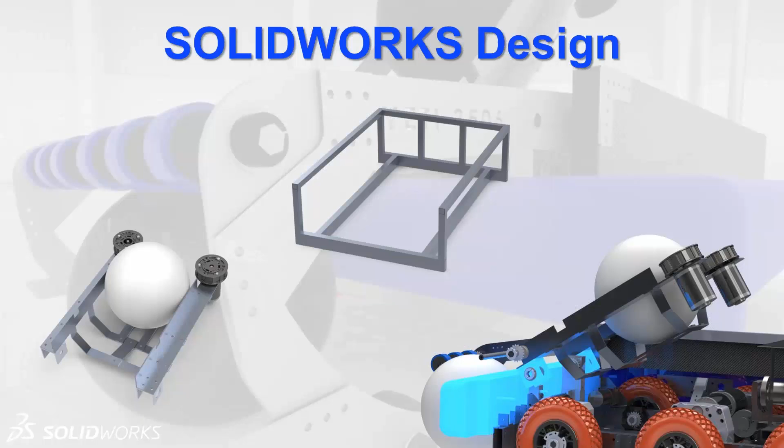And this season's build, nearly 6 weeks of hard work from very talented students and guided by dedicated mentors, concluded just 2 days ago, and competition begins next week. Today we're going to look at how SOLIDWORKS enables these students to design these amazing robots in such a short time frame.

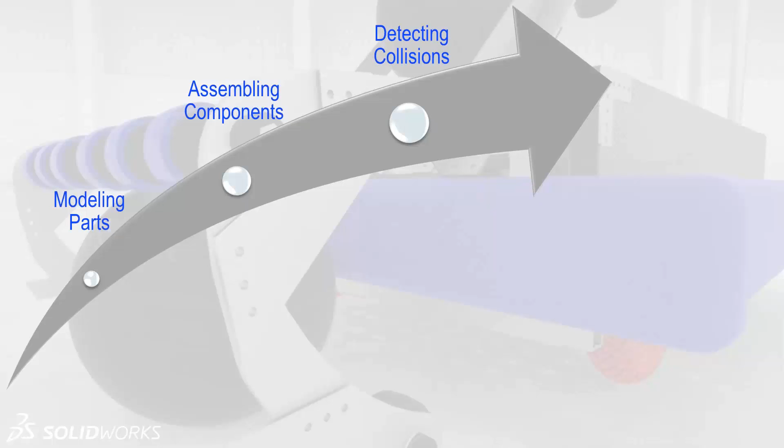So breaking it into 3 segments, the first segment we're going to address creating models of components, whether they're multi-body parts like you see in the frame example here, or individual parts. Typically we get a concept, we sketch it out, and then we start our 3D modeling.

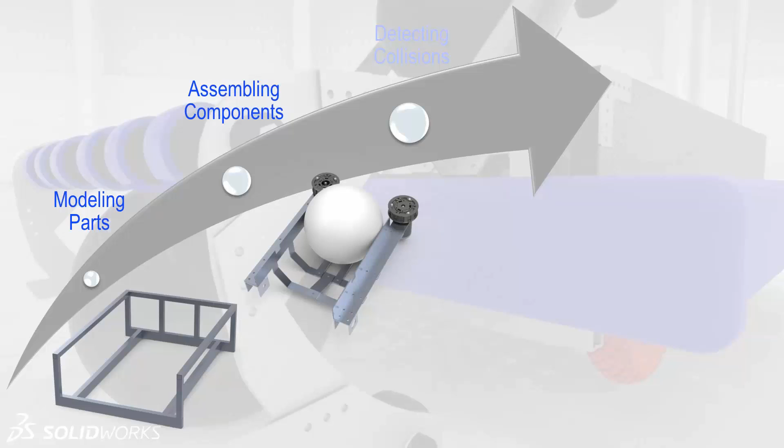Once we've created some models, then we assemble components. So we'll have a segment that focuses on creating assemblies. And then lastly, we'll take a look at a segment that shows you how to leverage your 3D data. Obviously, we're talking about working with some pretty complex designs that have a lot of moving components and requirements. So taking a look at leveraging our 3D data to get the most out of our 3D information.

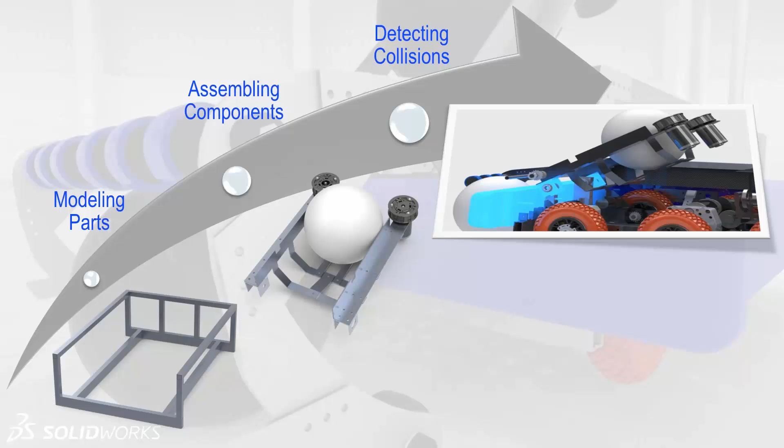So our first demonstration segment will go from a concept sketch of a layout of what the frame needs to look like for this particular design to a finished part that's ready to go into our robot.

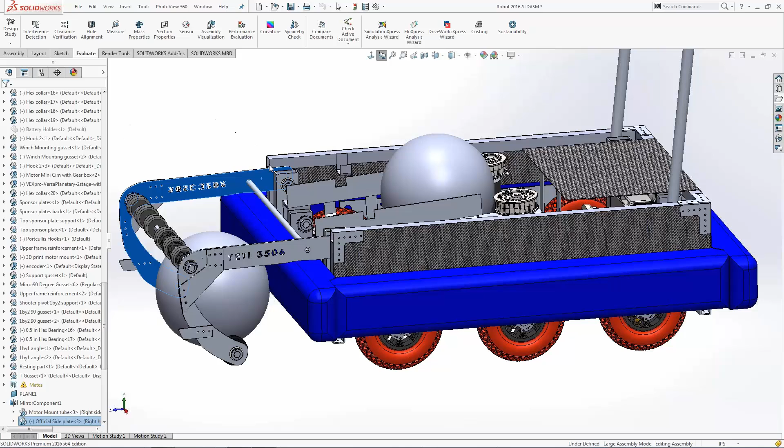So to get started, we'll take a look just at the finished robot here quickly. We do have some moving components within our assembly. We do have some simulated real-world moving components.

We'll take a look at the frame structure that we're going to be working with. So the frame is aluminum extruded square and rectangular tubes. So regardless of the profile that we choose to use, the philosophy kind of goes the same. We start with a layout and then we start populating our structural components. So let's take a look at that.

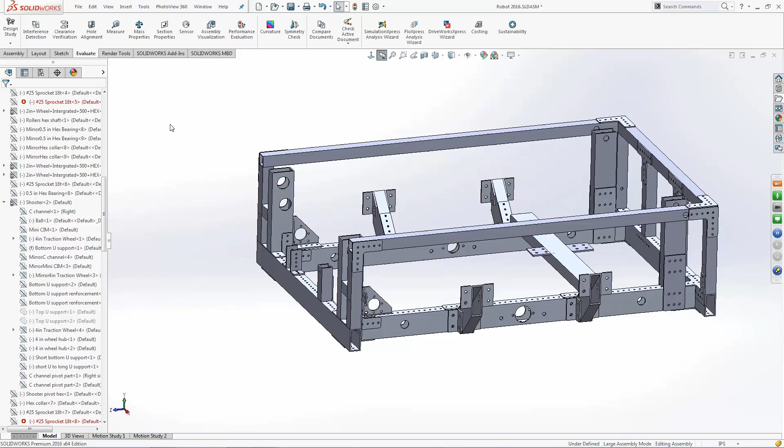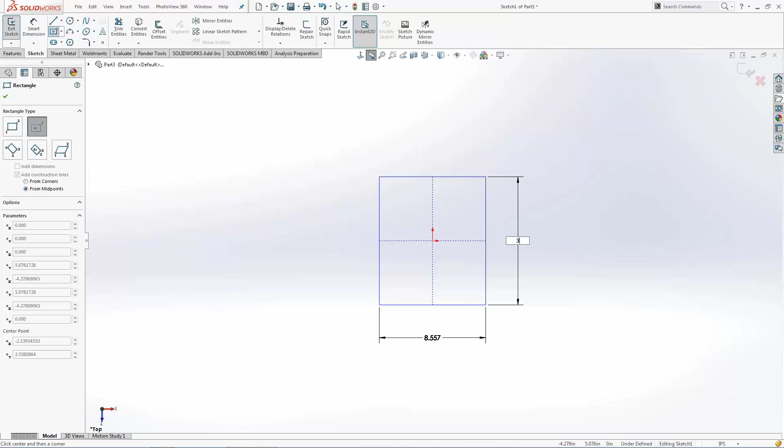We'll start by launching a new part in SOLIDWORKS. And the approach that I'm going to show is slightly different than a traditional approach. This approach kind of allows you to do a layout sketch as you would normally do. But in addition to doing a traditional layout sketch, I'm actually going to start by generating a solid, and then I'll use that solid to generate my 3D sketch. It's a little different technique.

One of our application engineers created a 3-minute Thursday video kind of showcasing this design process, calling it wicked fast weldments. Okay, so I've got a base structure of the overall shape.

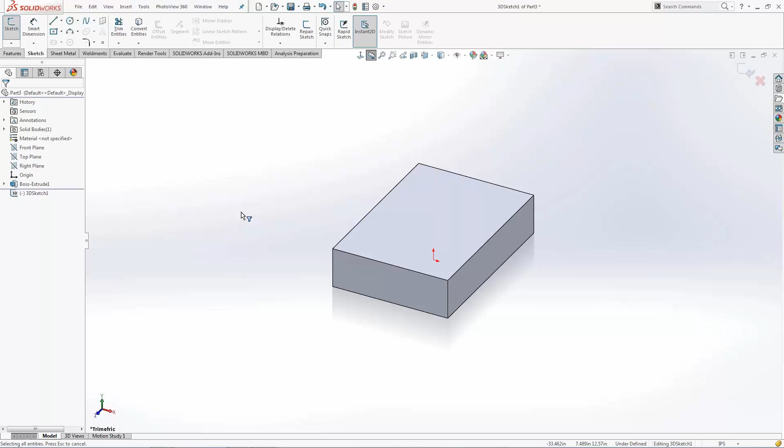This could be very simple like you see here, or it could be more complex. And the idea is we're next going to create a 3D sketch. We're going to select all the edges and we're going to convert those into our 3D sketch. So very quickly we have a nice layout. We can kind of hide away that body, get it out of our view, and we have a nice overall layout of the shape that we want to use.

So some of this information may not be needed, so I'll keep it here just for reference, just for my own purposes.

And next, there's some vertical support structures. So rather than doing any separate sketches, it's really not needed. If you're working with a three-dimensional sketch, it's very simple and straightforward to just go ahead and continue adding these sketch lines within your three-dimensional sketch.

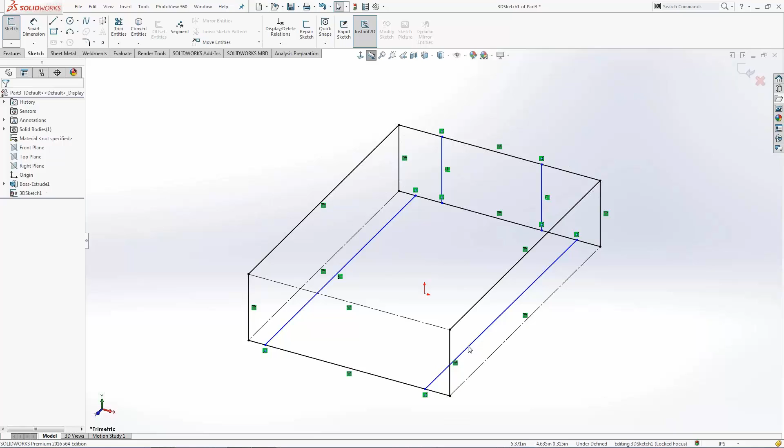Okay, so in sketching in a 3D environment, we'll just pick up some relationships along various directions so that we can ensure these lines are lined up as needed. And if not, we can simply add relations. So in 2D sketches, we're doing horizontals and verticals. In 3D sketches, we're going along specific axes. So to finish off my sketch, we always want to use fully defined sketches. We'll go ahead and just add in a couple of dimensions here.

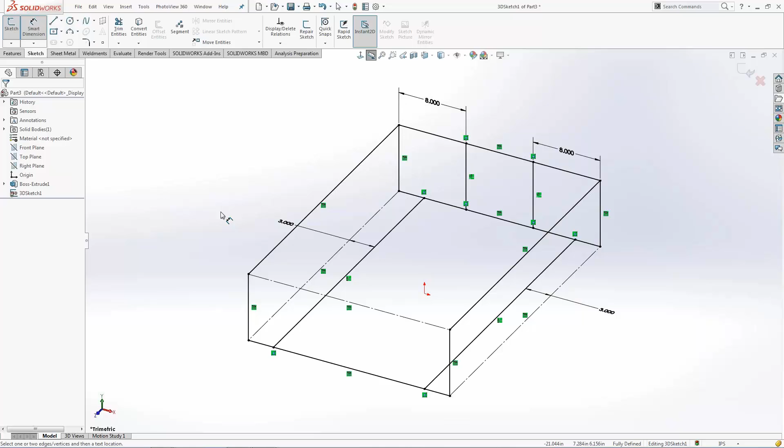So there's my complete layout sketch. Fully defined sketch, it's got all the information that I need. And again, it's going to be very simple to make changes later on.

So for structural members, once we have our layout sketch, we go ahead and launch the structural member command. In dealing with weldments, we're able to pull from a vast library of various types of profiles and shapes we might want to use, such as I-beams, angles, square, round, rectangular tubing, things like that, aluminum and steel, all built together in a nice library that comes with the software.

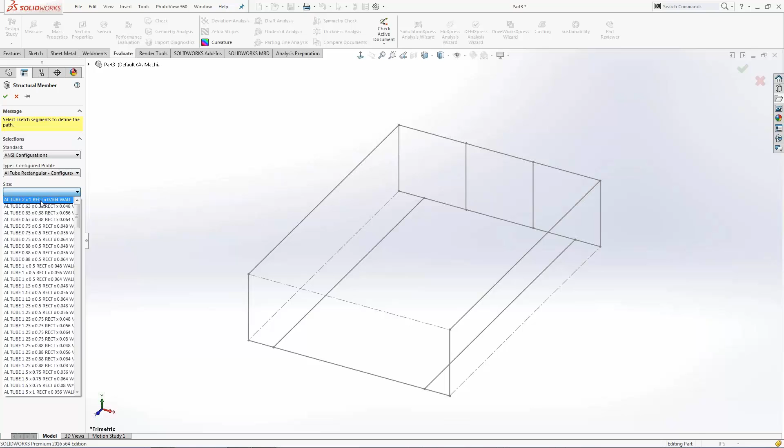So in today's example, we'll start with some rectangular aluminum tubing. When we choose the type of profile we're interested in, all the various sizes set up for that particular profile are listed, and you can choose from there. Ones that you use frequently will pop up at the top of the list.

So to populate our geometry, we're just going to visually select those sketch lines in the graphics area that will define the location of the geometry. If the profile isn't in the exact orientation that we need—for example, if we want these vertical legs to be full length, we want this base structure to start all the way down at the bottom here—we can simply locate the profile and choose a vertex from it to relocate things.

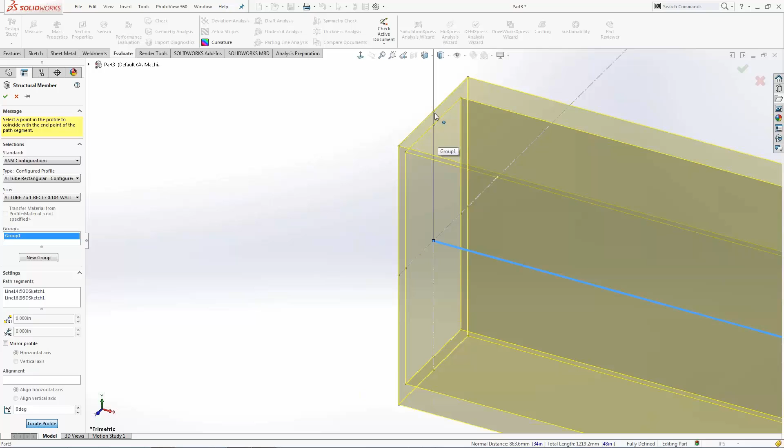Okay, so when I select that, notice everything shifts down, giving me a little bit of room there. Again, I can choose any of the vertices from that profile to relocate things. And when I want to add additional members, like these long braces here, I just start a new group and make my selections.

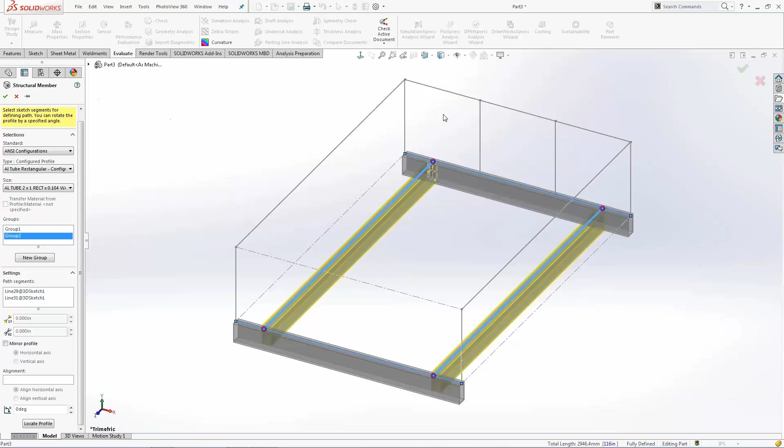Again, we'll locate those to shift things down a little bit. And the nice thing about working with weldments, as I zoom in a little bit, you'll see the preview in yellow here—it's showing that it's going to automatically trim that back so that we don't have overlapping structural members.

So with that first command, we've got all of our rectangular tubing laid out for the base structure. We'll do one more structural member so that we can add in all of our square tubing.

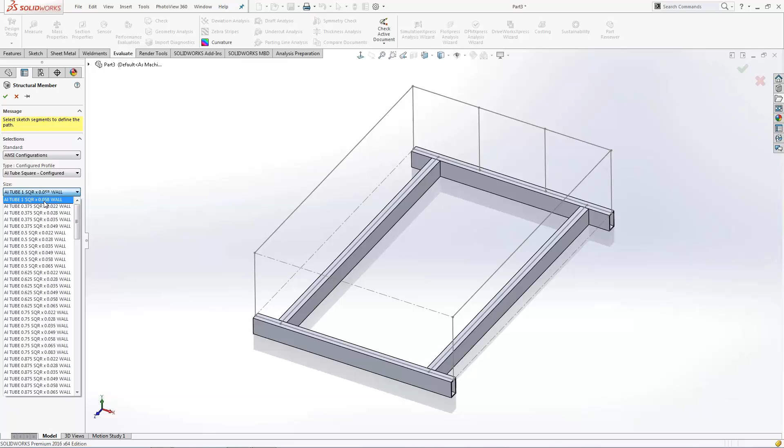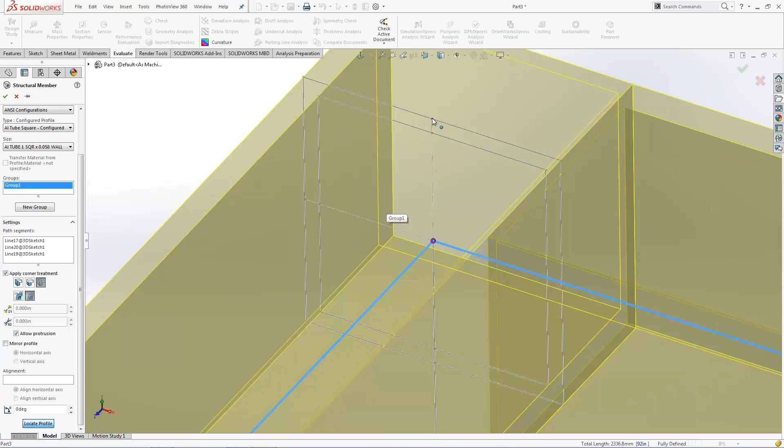Okay, so in similar fashion, we'll go ahead and select those sketch lines all the way around. Again, we can locate the profile if we want to push this up or push it down—so maybe we've got the overall height, I'll go ahead and push this down.

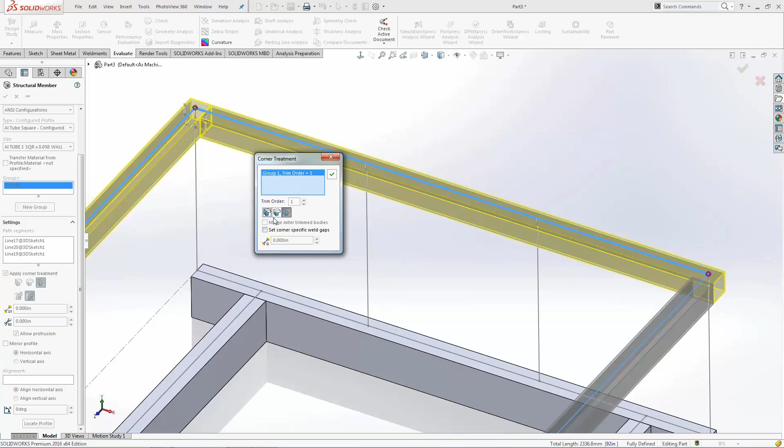Another thing of note here is the treatment at the corners. The software automatically trims those corners up. So if I want a long beam going across the horizontal here, at any of these nodes I can simply click in the corner and adjust so that this ends up being the longer beam, which trims back this other segment.

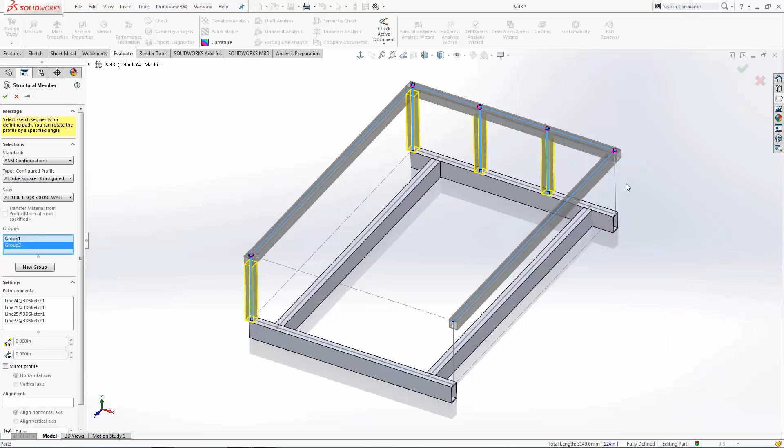Again, we'll add a couple additional groups here for all of our vertical members. As I'm populating those, take a quick look at the previews and you'll see that those will also be automatically trimmed at various lengths. Notice it's not going the full length of our line segment—it's going to automatically trim back at the top and bottom sections.

So in very quick work, we've laid out kind of a base frame structure. Additional tweaks that we might want to do—for example, we may want to extend that lower base frame structure—the functionality is combined into a single easy to use command, trim and extend.

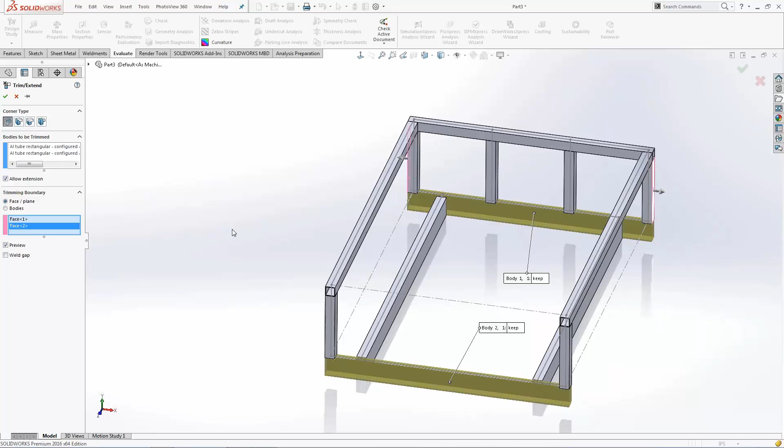So you simply select the pieces that you want to work with and then choose where you want to adjust them up to. I want it to go all the way to this outer end face on this side, and the other side. We can see with the preview here that it's going to extend both of those bodies all the way up to those outer end faces. Pretty nice.

Some more things we would typically add are materials. So let's go ahead and choose a material that we might want to use for this. Remember the body that we had created in the middle.

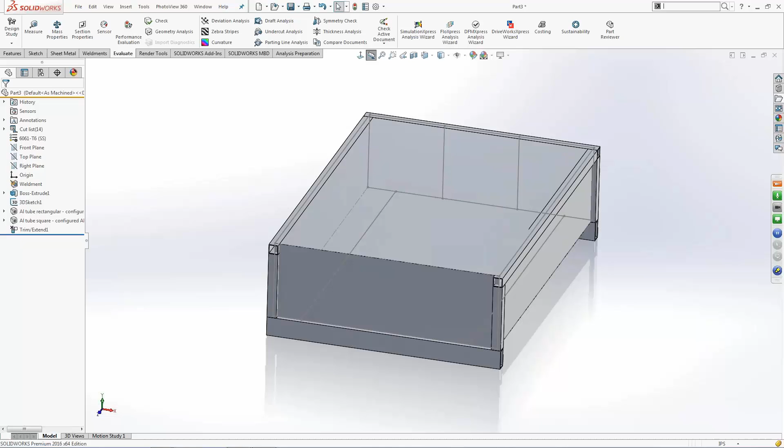When we go to do mass properties and things, we really don't want to have that body lying around anymore. So an extra bit of cleanup work I'd recommend is to just delete that body as a feature towards the end. So it's no longer in the model, but the body in the history tree earlier on is still there, so all of the driving dimensions are still available.

So let's say we want to make some quick changes here and adjust the length of some of these segments.

We can take a look at the mass properties, and since we've applied materials, we can see the weight of our design. If we wanted to monitor the weight, we can create sensors to do that. Sensors can monitor values, dimensions, and various simulation results, and they can alert you if a value becomes greater than or less than a certain threshold - for example, if you violate some criteria, maybe 150 pounds is the maximum weight of the entire assembly.

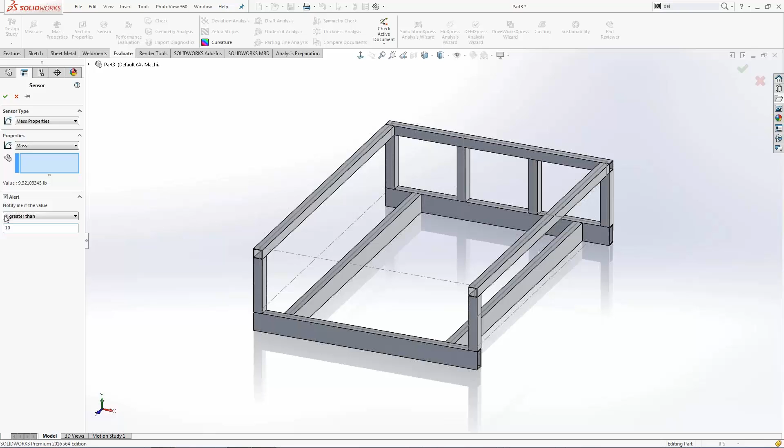Obviously weight is a big concern for these robotics teams, so let's monitor the weight and make sure it doesn't exceed 10 pounds. The sensors will show right here, and as we make some design changes, maybe adjusting the overall length, as soon as we violate that sensor we get alerted. It throws out some big flags and lets us know that we've exceeded what that sensor was set up to alert us for.

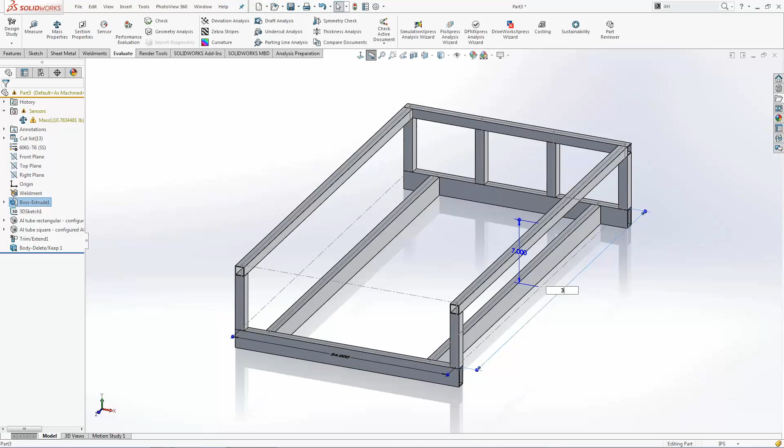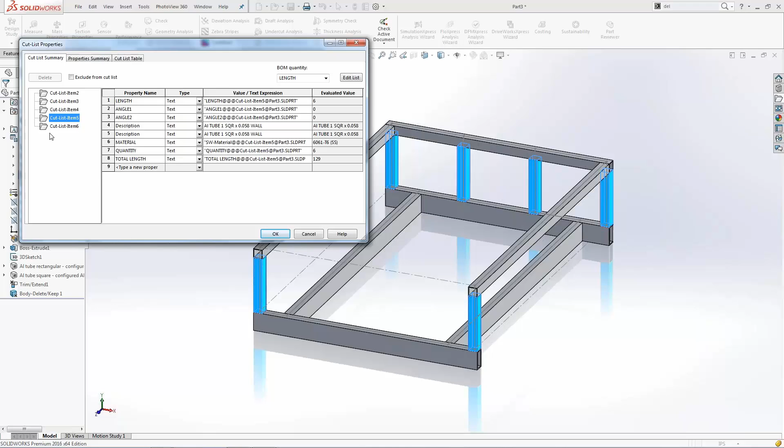One last thing to take a look at here is that when working with weldments in SOLIDWORKS, it automatically generates a cut list for you, and it groups together like components. So any structural members with identical geometry automatically get grouped together as items within the cut list, and notice part numbers and descriptions are values we could enter in.

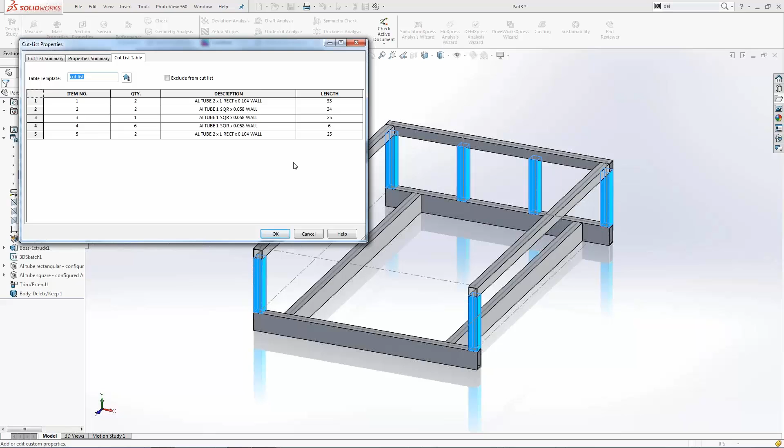If we take a look at the cut list table, descriptions automatically populate for us, as well as the overall length of these structural members and quantities. So here's a preview of what our finished cut list is going to look like, similar to a bill of materials in an assembly, for example.

So in our first short demonstration segment, we got a chance to see how SOLIDWORKS is extremely fast and allows you to create some incredibly intelligent designs that are easy to manipulate.

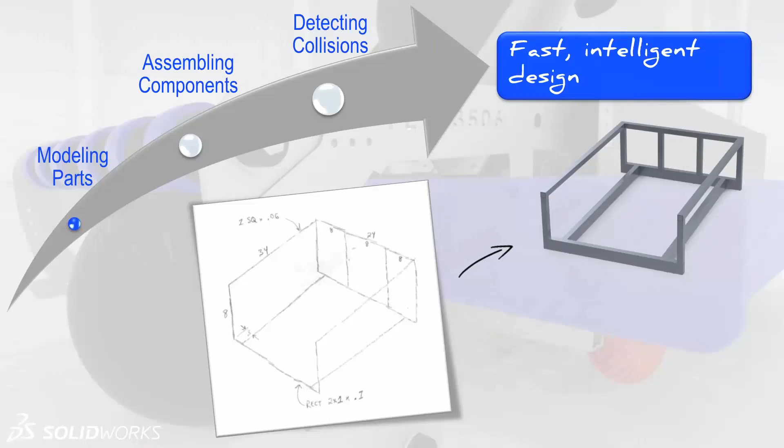In our next short segment, we'll take a look at how we can take some components that have been created and start building our assembly structures from those components.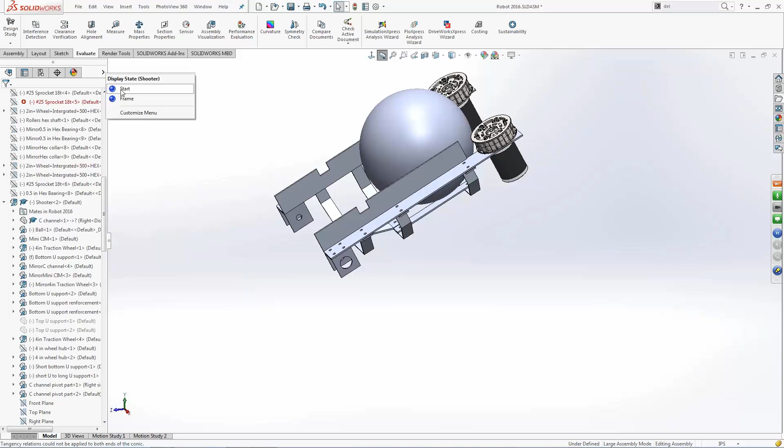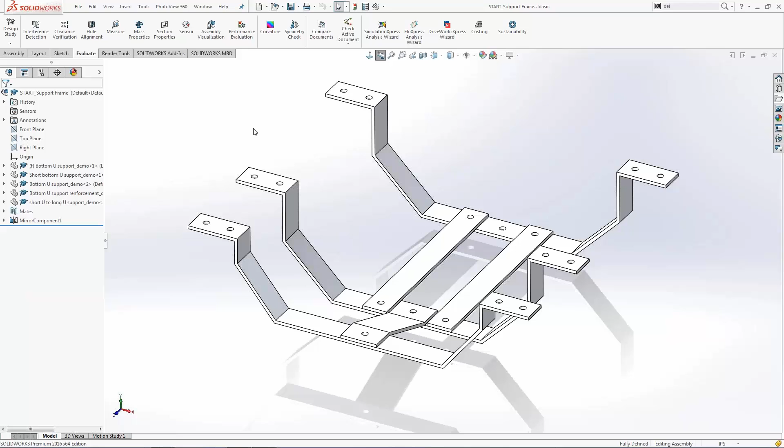Okay, so for this I'll start with a subassembly structure that's already been generated. This could be done in sheet metal and weldments, and we've got the subassembly structure already started, so we'll go ahead and launch to create an assembly.

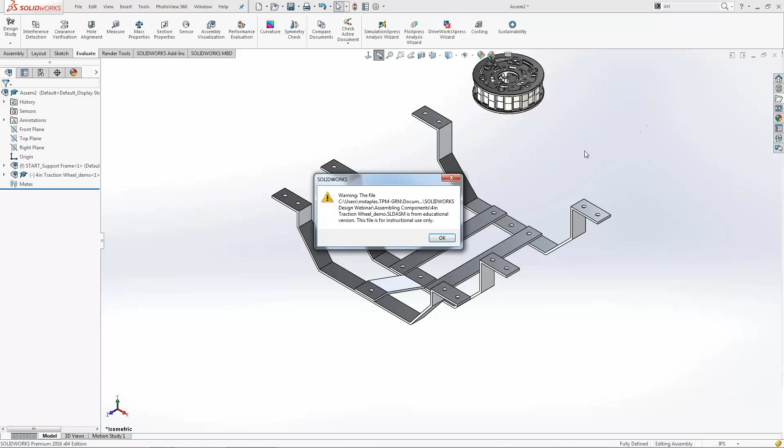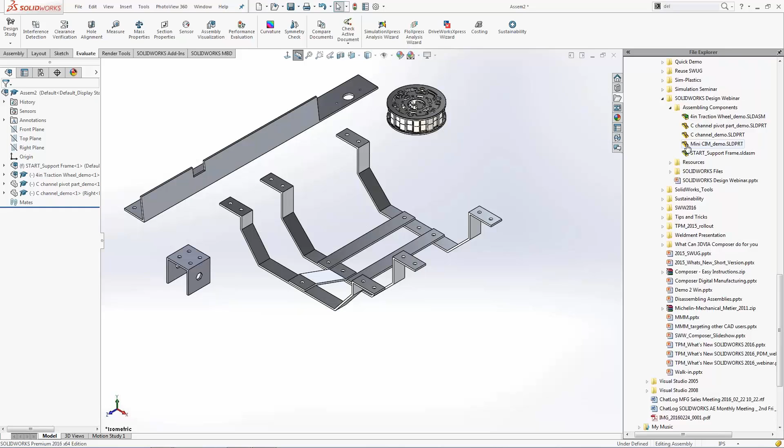With this assembly, it's really just a matter of browsing to the components you want to add and drag and drop them in. If these are frequently used components - and we'll get some messages here about the student version since these are student donated files - we get a nice preview of the components. If there are configurations, we get an opportunity to choose the appropriate one. And if these are components we're going to use frequently, we would definitely build up a library, and within that library we would add some mate references so we could really just drag and drop them from here and immediately snap them into position.

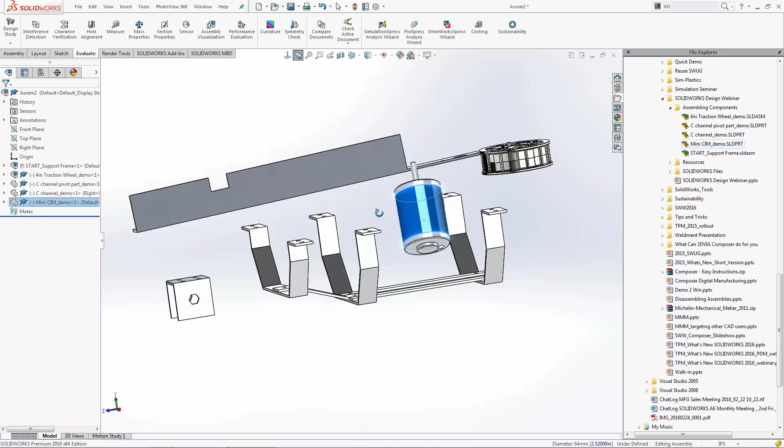Okay, so these are again some components that were donated, so I don't have that extra level of intelligence built up in this - you get a chance to see the day-to-day process of any components you've designed and getting those positioned in your assemblies. So the very first thing I do when working with an assembly is simply get the components placed in there, maybe move things around a little bit and get components rotated, set up so that we're ready to start positioning these components.

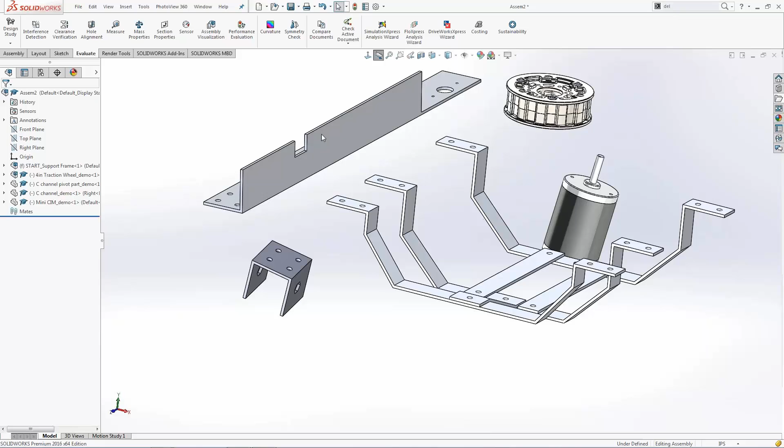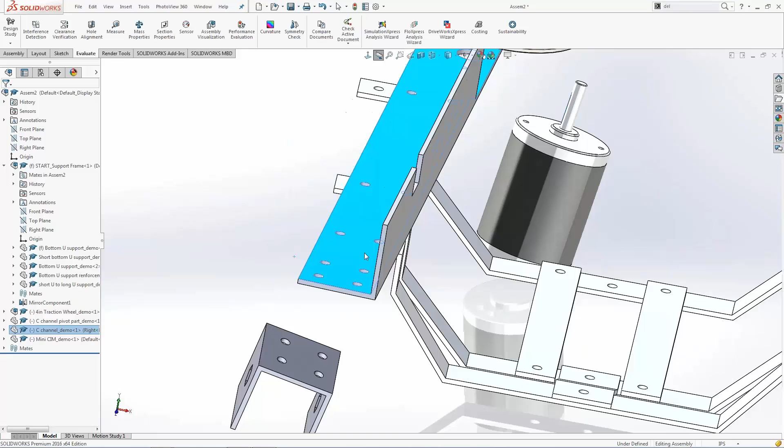Okay, so I'll show a couple of different techniques to start placing these components where they belong. The first technique is a manual process, simply selecting the faces we're interested in mating together and snapping them into place. That's a pretty straightforward process, and again it's a pretty fast one.

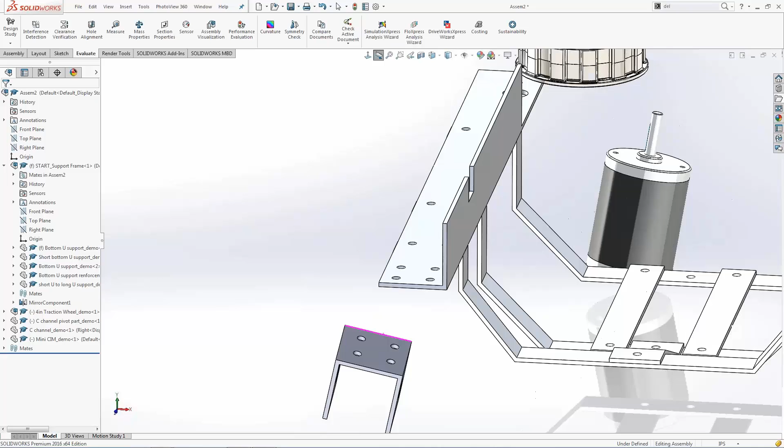Doesn't take too long. Select one, select the other, and you can line up faces and holes and get things positioned appropriately. To speed things up a little, we can grab edges and do smart mating, dragging components around to match up multiple faces at the same time. So we matched up these two faces to be coincident and lined up the holes all in one quick command.

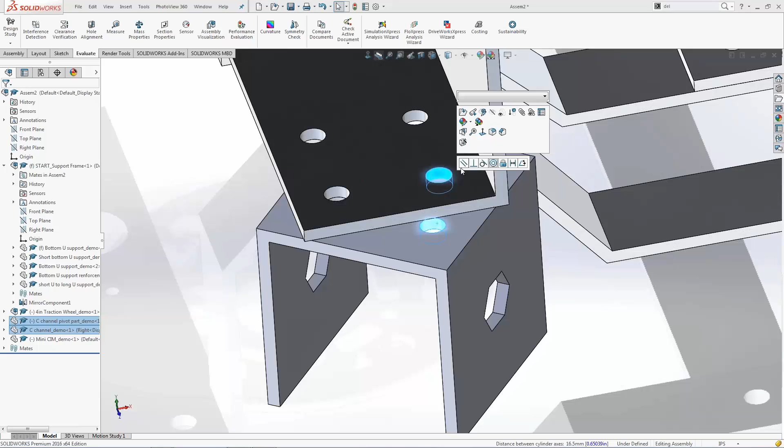Okay, we'll take a look at the other side and get this guy positioned. That last technique I just showed is a very quick and useful one, so we'll show that again here.

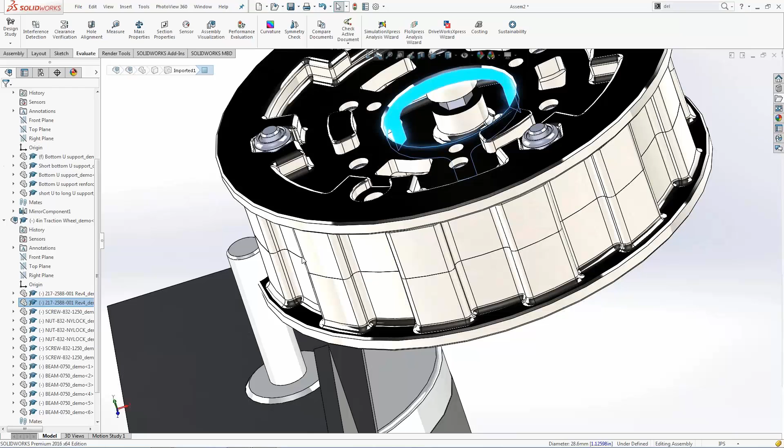So if we want to grab this edge right here, and as we drag that around, we'll just move it into position. And we now have that motor snapped into place exactly where it belongs. Again, there's no pre-setup work required to utilize that capability.

And maybe we want to position this with a little bit of a distance down here. Again, we can do that on the fly and set up that distance value.

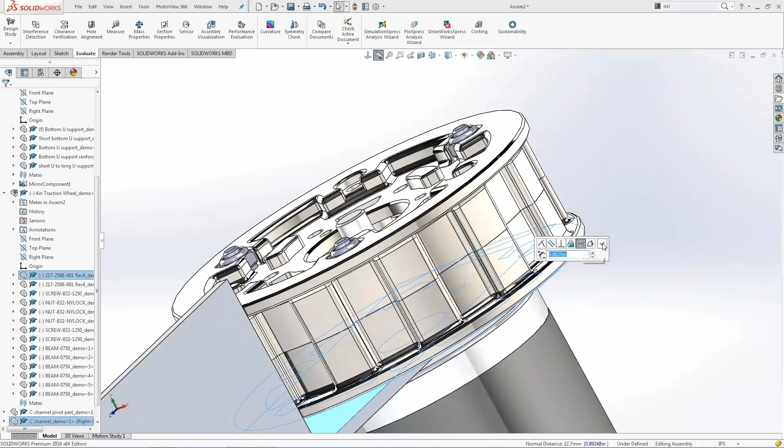So with just a little bit of work, we've got half of our assembly created, and of course any designs where you have symmetry, you can leverage that symmetry to populate things very quickly.

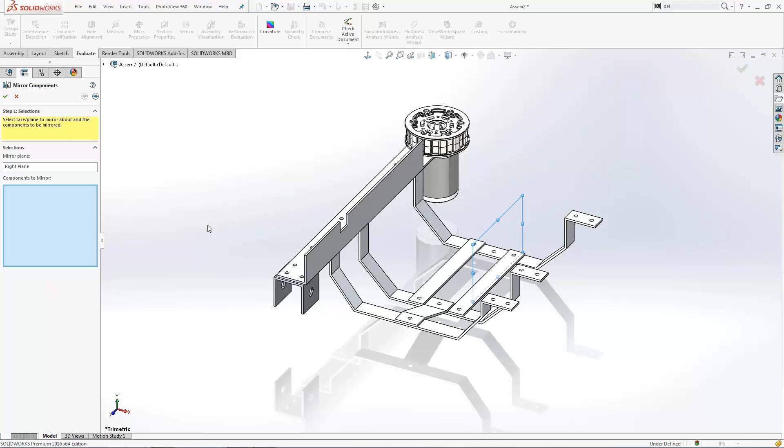So we'll take a look at the right plane here, and we will go ahead and mirror these components over to the other side. As we go to mirror these things, one of the choices we'll have is if we need a left and a right hand version of any of these components.

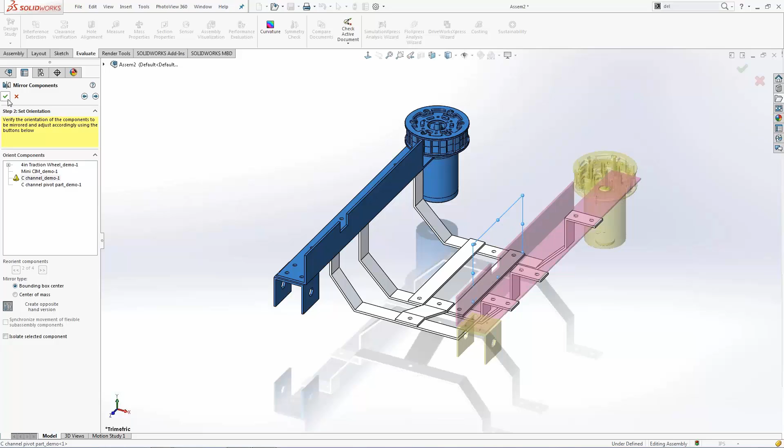For example, this C channel is going to need an opposite hand version over on the other side. No problem, we can create that on the fly as we mirror components within an assembly. We can create left and right hand versions.

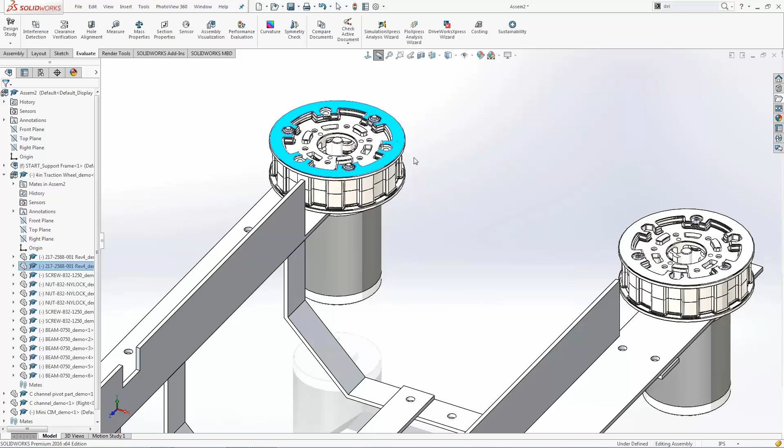We also get components fully positioned and we get dynamic movement. So as I go to test out the function of this design and rotate this wheel, we get the other side moving dynamically. Any changes to position, we truly have intelligence in mirroring, we have symmetry within our design.

Now, taking a break from the symmetry, if we have other configurations or versions, maybe we need a larger hole on just one side than the other, there's a configuration that's already been generated on that component. We can easily just switch a part over to that configuration.

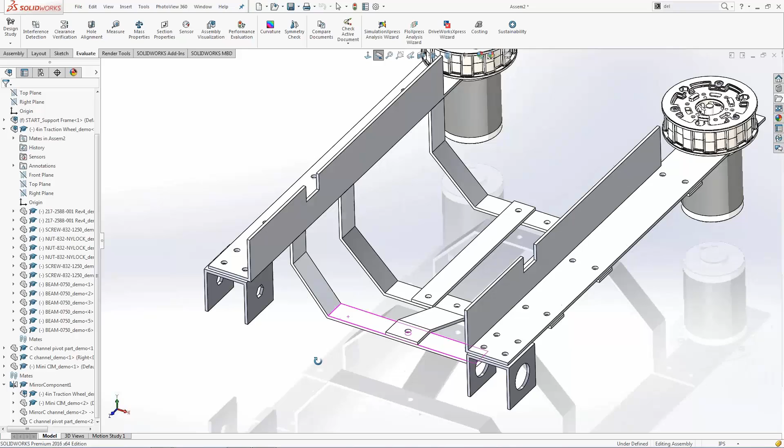So with that, we have a fully created subassembly that we're ready to pop into our higher level assembly.

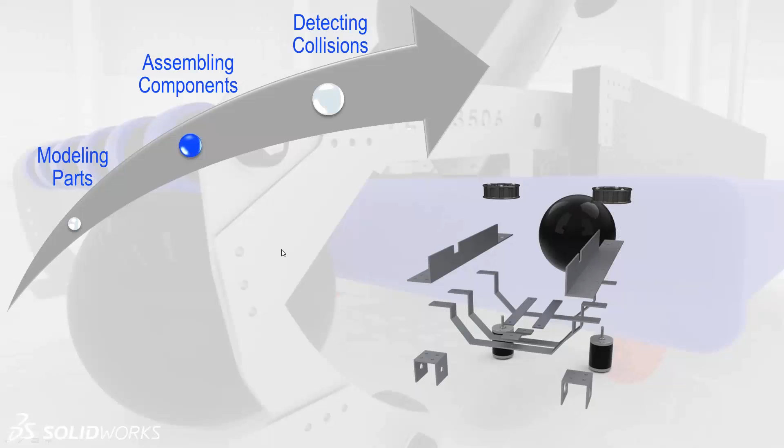So in that segment, you got a chance to see how we can leverage SOLIDWORKS to visualize exactly what our designs are going to look like and assemble components very quickly.

In our next segment, we're going to take a look at how we can leverage this 3D data.

So we've seen how we can create these assemblies, and again, this is a very complex assembly with a lot of moving components, a lot of intricate detail. There's over 800 parts in this particular assembly. And so we need to ensure that we have proper form, fit, and function.

Maybe we have some functional stops built into our design, so as we rotate to a certain angular position, the components are going to limit the travel and stop it at various orientations. So we'll show you a couple of the tools that we can use to analyze the effects of motion within our designs.

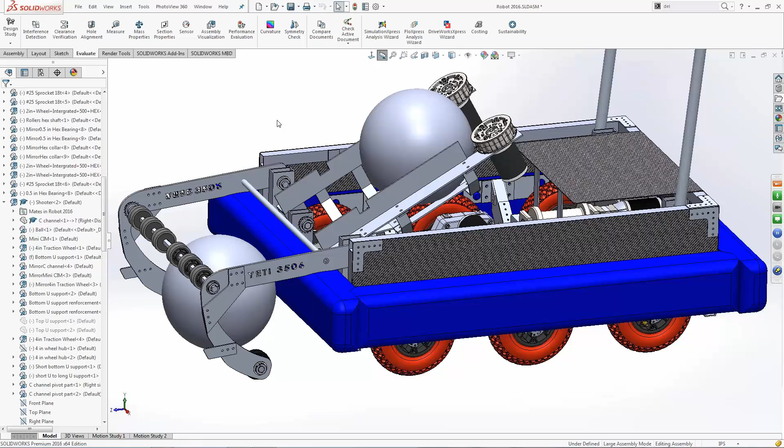Again, we're kind of focusing on the theme of leveraging this three-dimensional data once you've created it. Now it's time to go ahead and leverage that 3D data to ensure proper form, fit, and function.

So for this next portion, I'll hop into a section view where I've cut through many of the components, and we'll focus in on the area where we have this shooter subassembly. And as I grab this guy around, notice the shooter subassembly moving around.

Again, without the tools that we're about to show, it would be very challenging to make sure that there's no collisions in various regions of our design, and to figure out exactly which faces are going to start touching first and ensure accuracy.

One other thing I want to show as we go through this segment - we mentioned sensors a little bit earlier. So I'll create another sensor here, and this sensor is really to measure the angle for this particular shooter assembly. Maybe our design criteria is that it can go between 5 and 40 degrees, and we need to ensure that.

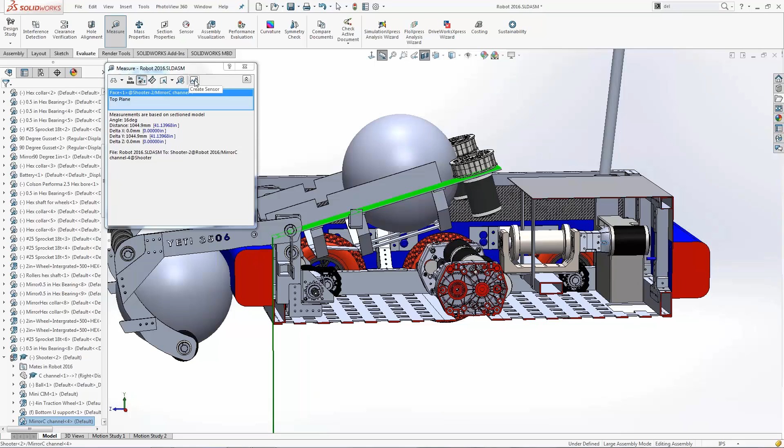Right now it's measuring at 16 degrees. We can take that measurement and generate a sensor from it just by saving it and choosing what information we want to capture. We'll go ahead and generate that sensor. It will show up at the top of the tree here, giving us the accurate measurement, and it's just going to monitor that. I didn't set any alerts - I just want to take a look at that value in real time.

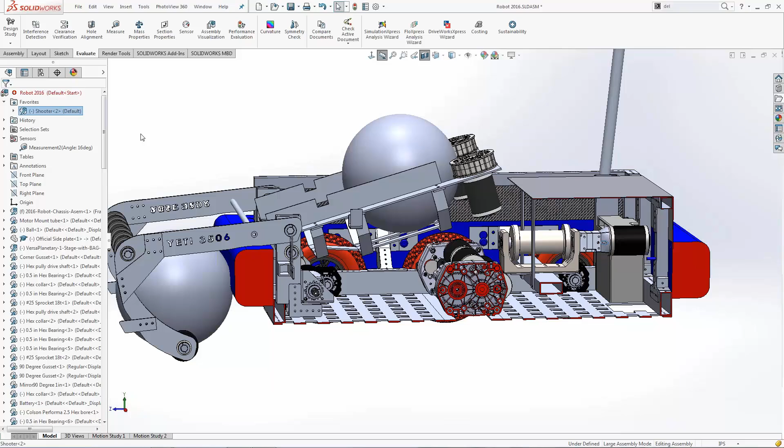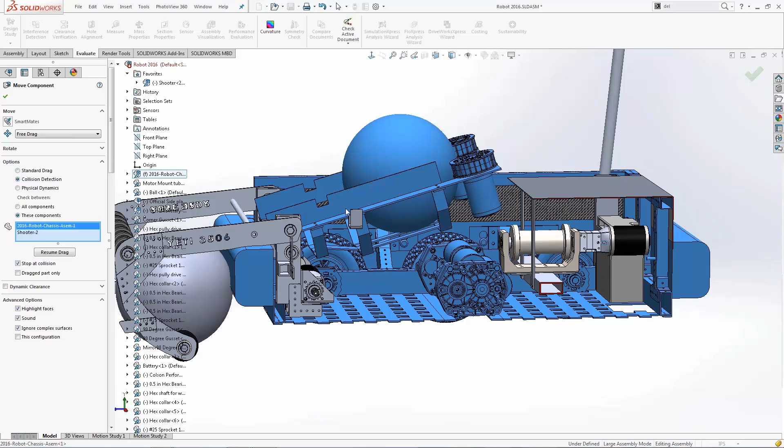As we go to move that component, I'm going to turn on an additional option. Instead of just dragging it around, I want to look for collisions within my assembly. I can look for any collisions, or I can get more specific and say I want to identify anywhere between the chassis and the subassembly that I'm finding a collision.

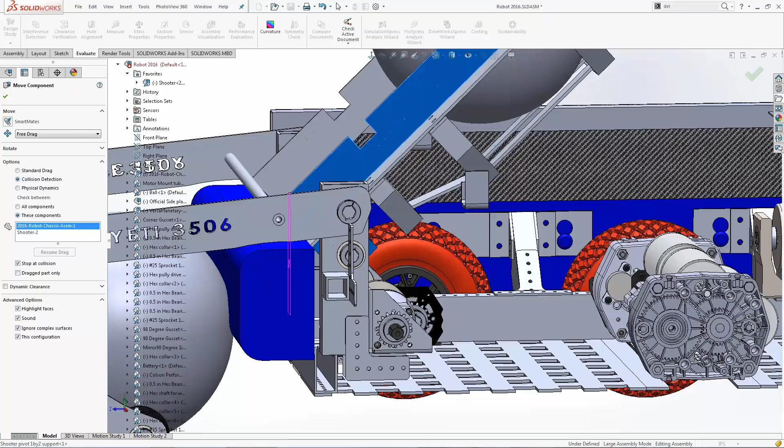As I start dragging this around, we'll get alerted with an audio alert. We'll get visual feedback. I'll zoom in here so we can see exactly where that collision is occurring, because looking at a complex assembly, it's not all that intuitive or obvious to see exactly where we're going to end up with these collisions.

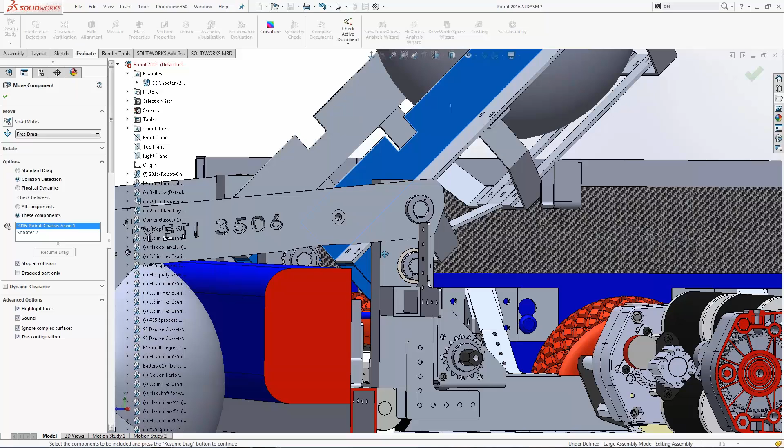As I rotate this upwards, we can see that these two blue brackets right here are highlighting in this bright blue color, indicating that they are colliding with this outer bumper structure.

And if I leave the assembly exactly where it is and just rebuild, I'm going to immediately get some feedback here telling me that angle is now 44 degrees. So again, we can verify if that meets our design criteria.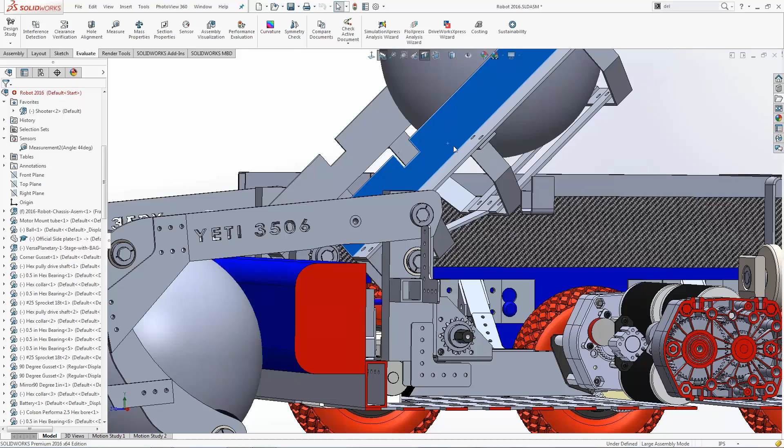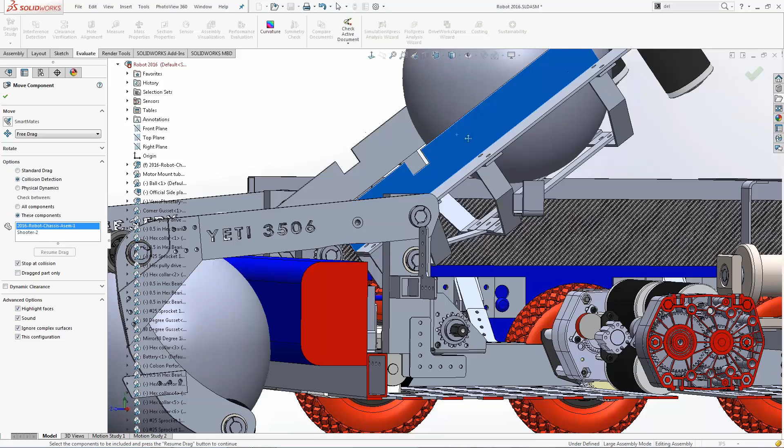Checking the other location, that side was probably pretty obvious that there was a functional bumper that was going to stop the component's range of motion. Going to the lower direction though, it's really not obvious exactly what's going to collide, how this design is going to function. So as I start approaching...

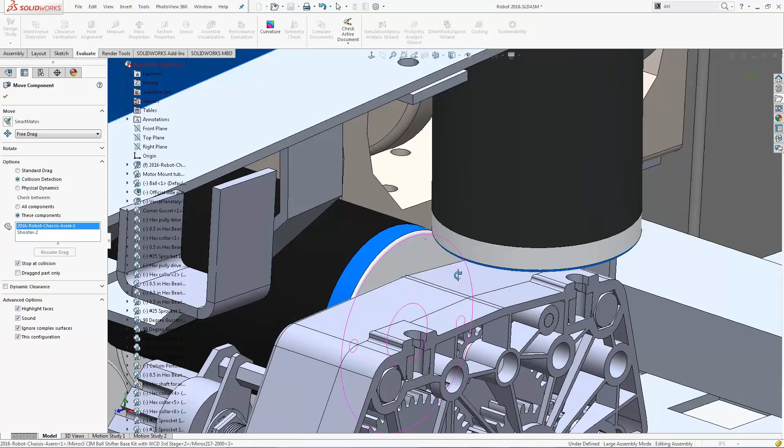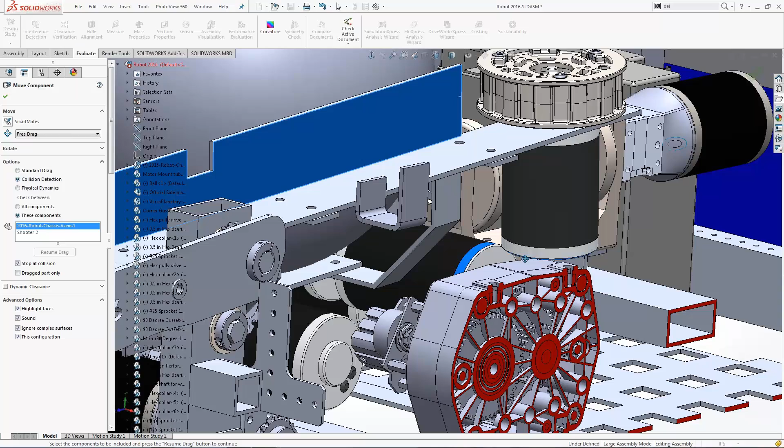I'll go ahead and zoom in a little bit tighter here. As we start approaching, we can see the highlighted faces in bright blue. The highlighted faces of the cylinder is actually what's hitting. So again, we can evaluate our design and ask, is that the intended stop? Do we need more range of travel? Do we need a functional stop designed into this where we've got some plates hitting instead of these cylinders?

I'll go ahead and hop out of this and we'll update our sensor again that's monitoring real time. It lets us know that our lowest angle - as we drag this subassembly down and retract it - is going to be 4 degrees.

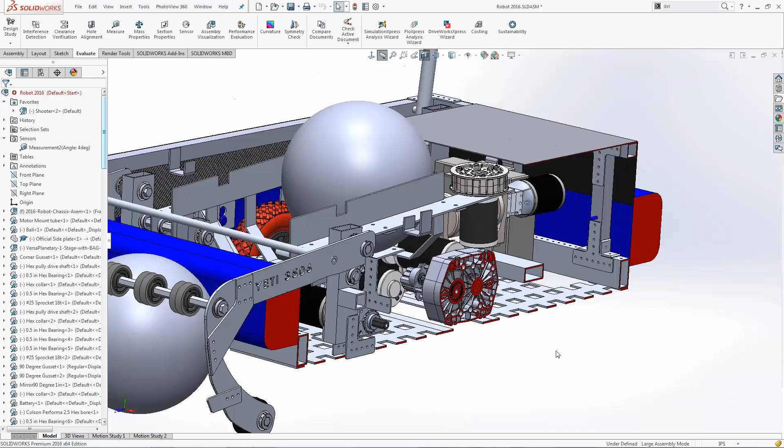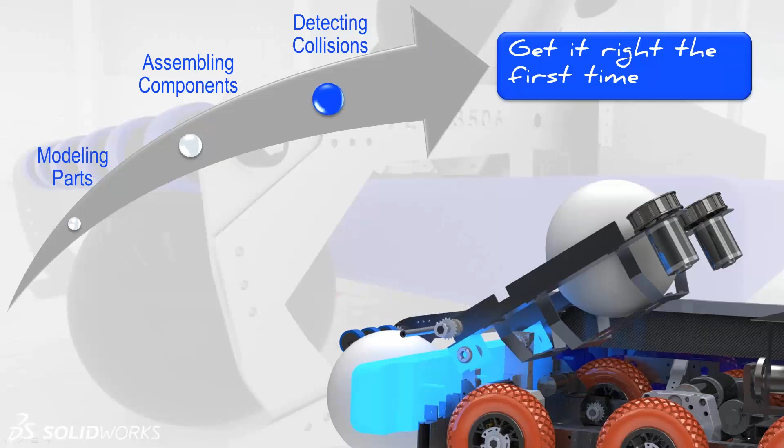In that segment we saw just one of the many tools we can leverage within our 3D designs to ensure we get our designs right the first time, whether it's looking for collisions or interference among static components, collisions among dynamic components moving around, or maybe some misaligned holes within our assemblies. We utilize the evaluation tools built into the software to check form, fit, and function, and to ensure accuracy before we start cutting steel and getting to the prototype phase.

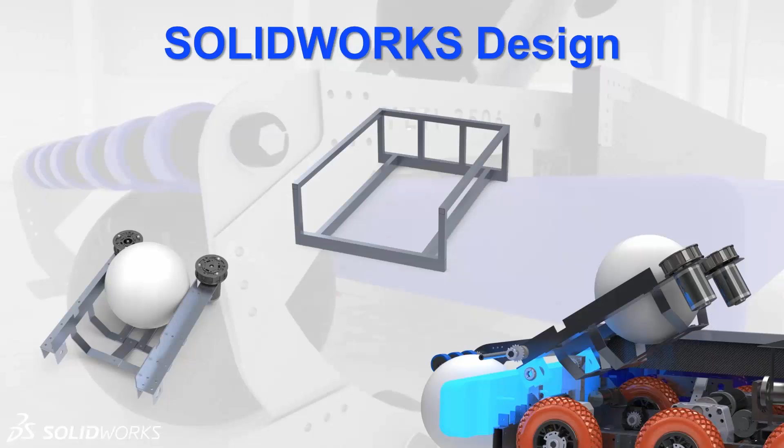So in summary, we got a chance to see a couple of short areas of common design work within SOLIDWORKS, and we got to see how SOLIDWORKS is fast. It's a great visual tool, and it allows us to be extremely accurate in our designs.